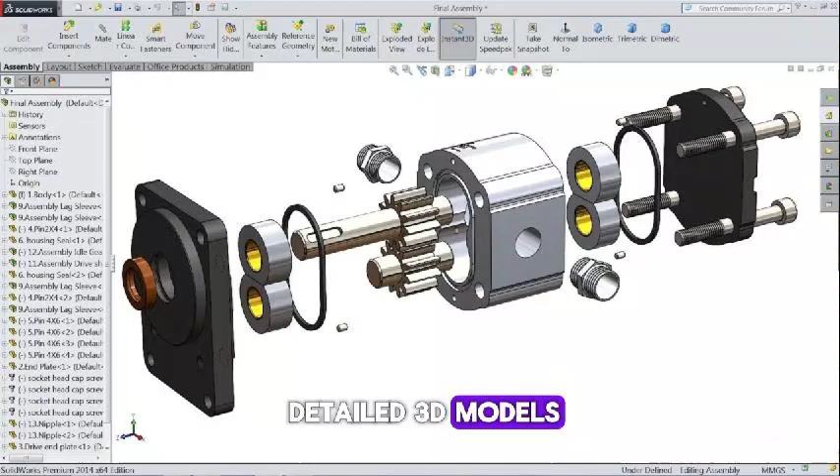Today, we're diving into a comparison between two industry-leading design software programs, AutoCAD and SolidWorks. Whether you're an engineer, architect, or a designer, choosing the right tool can make all the difference in your projects. So, let's break down the key features, pros, and cons of each to help you decide which one is best for you. First up, we have AutoCAD, developed by Autodesk.

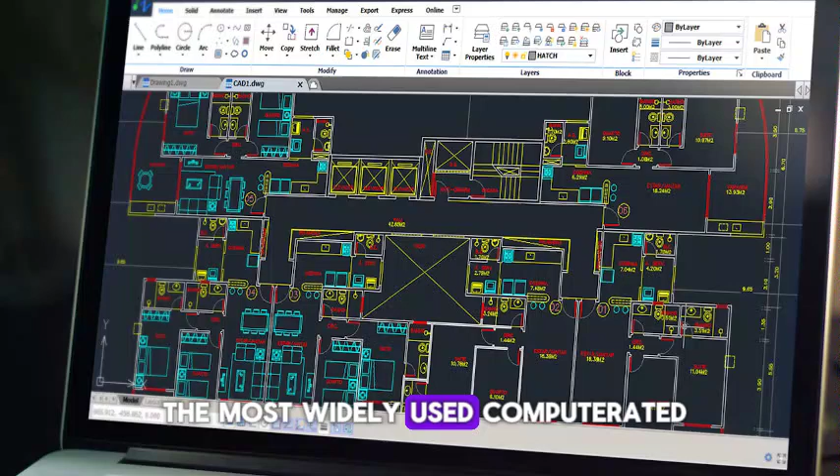AutoCAD is one of the most widely used computer-aided design (CAD) software applications in the world. It's primarily used for 2D drafting, but also offers some 3D modeling capabilities. AutoCAD excels in creating detailed 2D drawings for a variety of fields including architecture, engineering, and construction. The software is known for its precision, extensive library of tools, and flexibility in creating technical drawings.

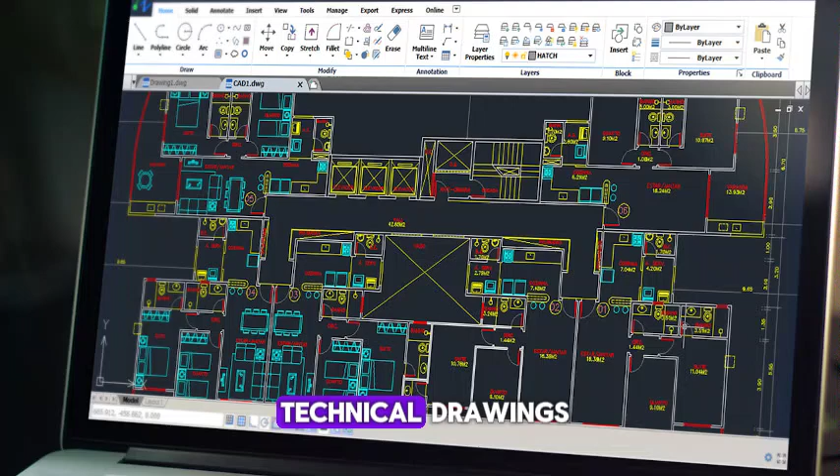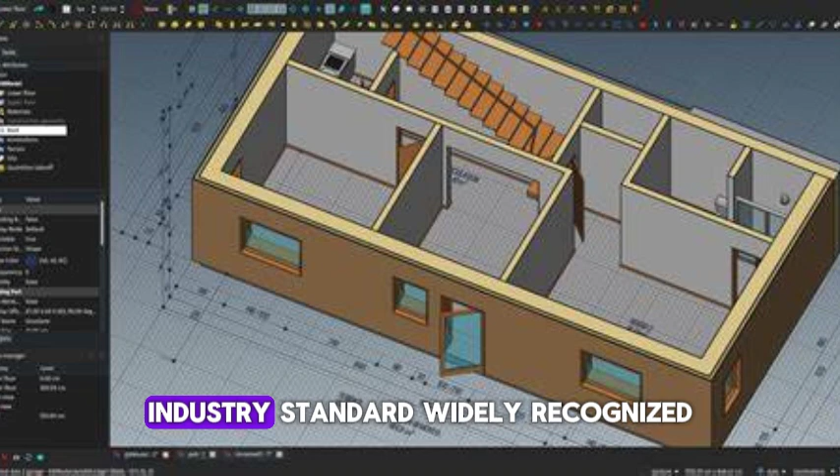Now, let's talk about the strengths of AutoCAD. AutoCAD's strengths include: 1. Versatility, ideal for a wide range of industries. 2. Precision, highly accurate for 2D drafting and detailing. 3. Extensive toolset, comprehensive tools for drafting, annotation, and design. 4. Industry standard, widely recognized and used, ensuring compatibility and ease of collaboration.

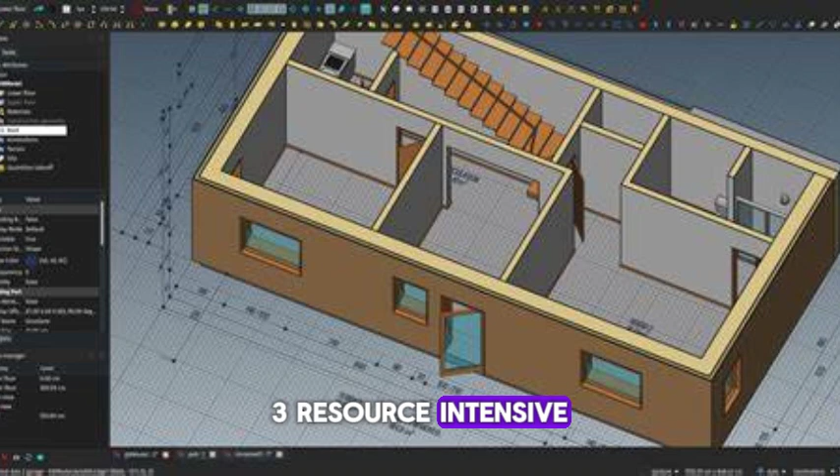However, AutoCAD is not without its limitations. Some of the limitations of AutoCAD are: 1. Steep learning curve, can be complex for beginners. 2. 3D modeling, not as robust as specialized 3D modeling software. 3. Resource intensive, can be demanding on your computer's hardware.

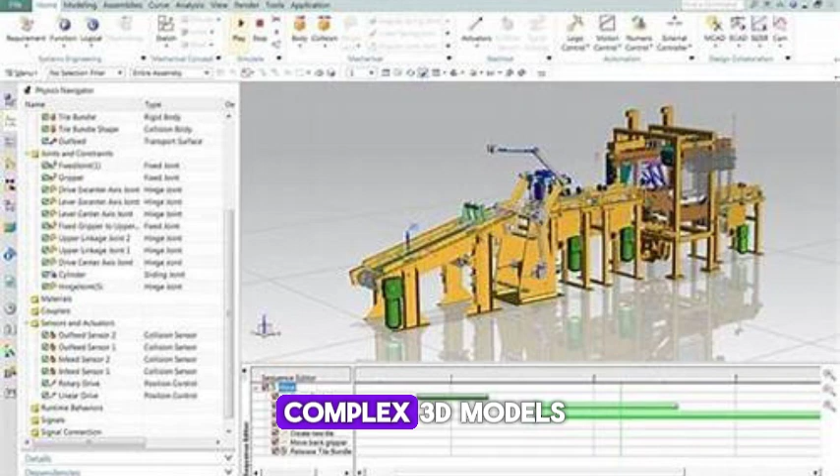Next, let's shift our focus to SolidWorks. SolidWorks, developed by Dassault Systèmes, is a powerhouse in the world of 3D modeling and simulation. Unlike AutoCAD, SolidWorks is primarily focused on 3D CAD, making it a favorite among mechanical engineers and product designers. SolidWorks shines in creating complex 3D models and assemblies. It offers advanced simulation tools, which allow engineers to test and validate their designs within the software.

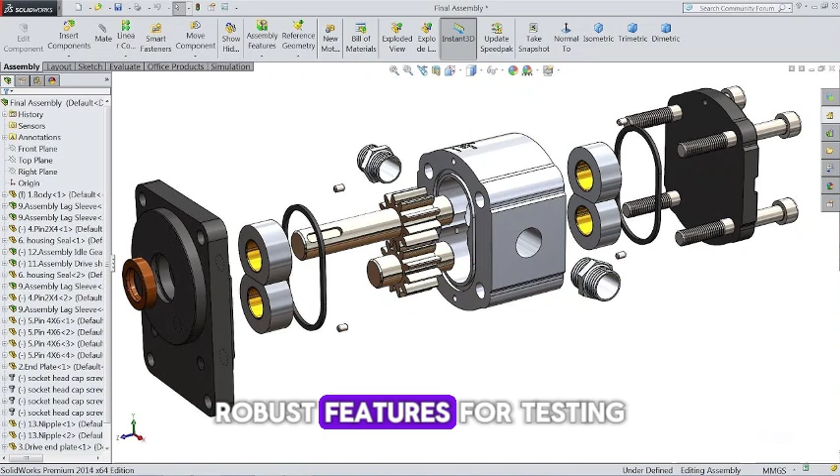Let's dive into the strengths of SolidWorks. SolidWorks' strengths include: 1. Advanced 3D modeling, exceptional tools for creating detailed 3D models. 2. Simulation and analysis, robust features for testing and validating designs. 3. User-friendly interface, more intuitive for 3D modeling compared to other software. 4. Collaboration tools, excellent for team-based projects and version control.

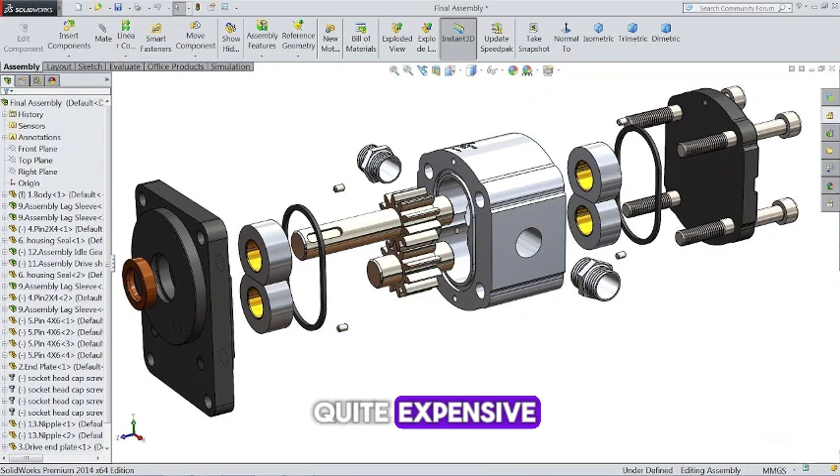But like any software, SolidWorks has its own set of limitations. Here are some limitations of SolidWorks: 1. Cost. Can be quite expensive, especially for small businesses or individual users. 2. Learning curve. While user-friendly for 3D modeling, it can still be complex to master. 3. Hardware requirements. Needs a powerful computer for optimal performance.

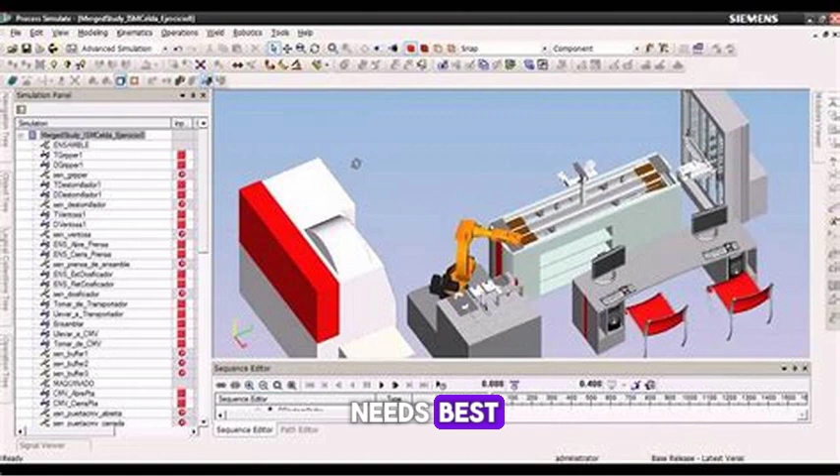Now that we've covered the basics, let's compare the two side by side. Here's a quick comparison to help you decide which software suits your needs best. Purpose. AutoCAD is versatile with a focus on 2D drafting, while SolidWorks excels in 3D modeling and simulation. Ease of use. AutoCAD can be complex for beginners, whereas SolidWorks offers a more intuitive interface for 3D tasks.

Cost. AutoCAD generally has more flexible pricing options, while SolidWorks can be pricier but offers powerful features. Industry application. AutoCAD is widely used across multiple industries, whereas SolidWorks is predominantly used in mechanical and product design.

So, which one should you choose? It really depends on your specific needs and industry. If you need precise 2D drafting for architecture or construction, AutoCAD might be the way to go. If your focus is on 3D modeling and mechanical design, SolidWorks could be your best bet.